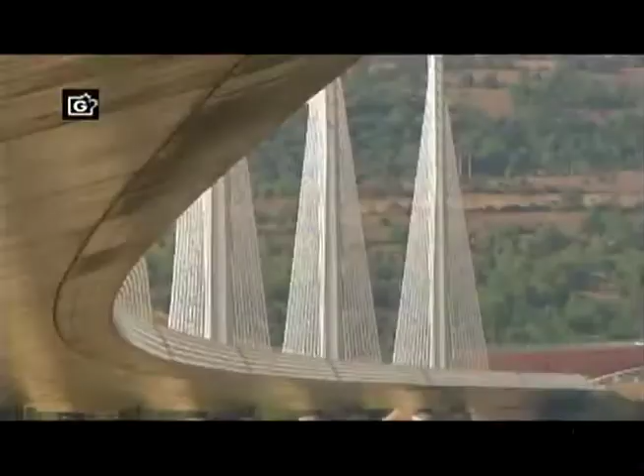This is the Millau Viaduct, the tallest bridge in the world. Its highest tower stretches a staggering 343 meters. So high, the bridge glides above the clouds. But this is a megastructure they said couldn't be built. When I first showed the drawing of this bridge, they really thought I was crazy.

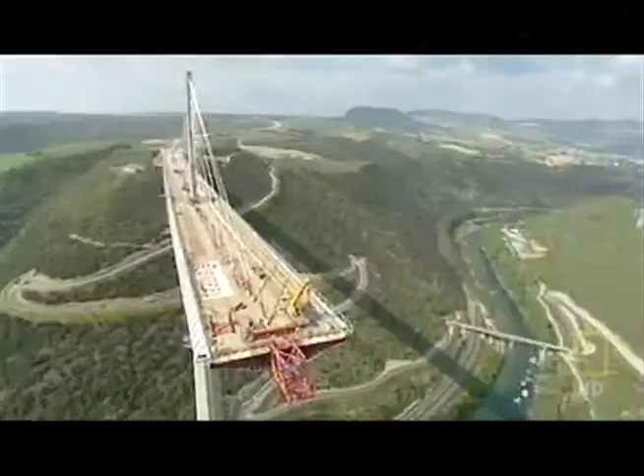The team attempting to build this amazing freeway in the sky had to survive landslides, fight winds gusting at 130 kilometers an hour, and weather massive storms as the bridge simply hung in the balance. It's a bridge that pushes the boundaries of engineering to the limits, and then beyond.

Imagine building a series of Eiffel Towers, then slinging a 4-lane highway between them, all the way across one of the deepest valleys in France. Impossible though it sounds, that pretty much describes the building of the Millau Viaduct.

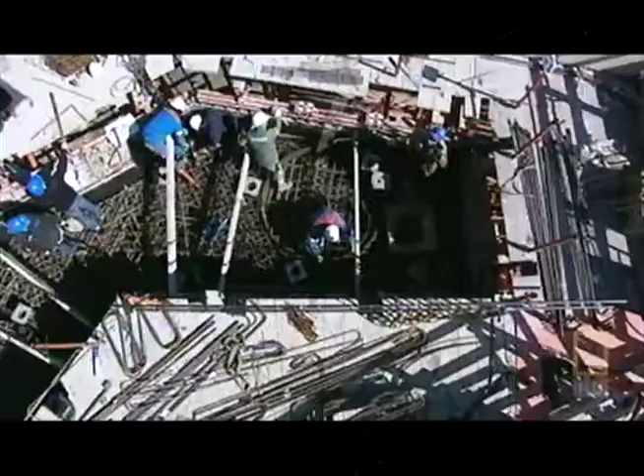From the start, the construction team faced 3 daunting challenges. 1, build the tallest bridge piers in the world. 2, put a 36,000-ton freeway on top of them. And 3, erect 7 steel pylons, each weighing 700 tons. And what's more, they had to do this hundreds of meters above solid ground. So high that if you were on top of the Eiffel Tower, you'd still be looking up at this awesome bridge.

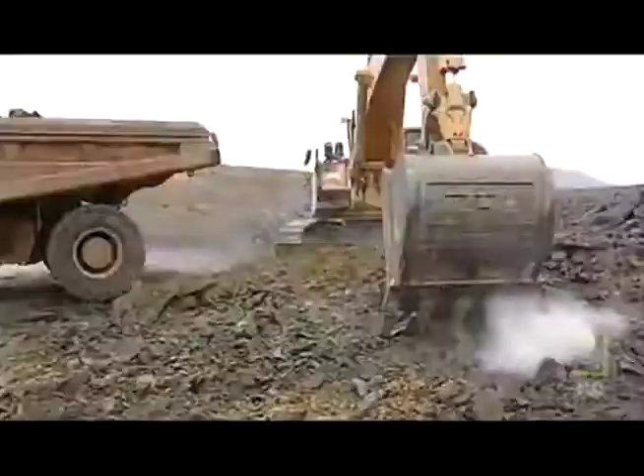October 2001, the team break ground. They're required to build a bridge that'll last for 120 years. And to win the contract, the teams promised to build it in record time, less than 4 years. By comparison, the world's longest suspension bridge, the Akashi Kaikyo in Japan, took a full 10 years to build. To up the ante, any delay will cost them $30,000 a day in penalties.

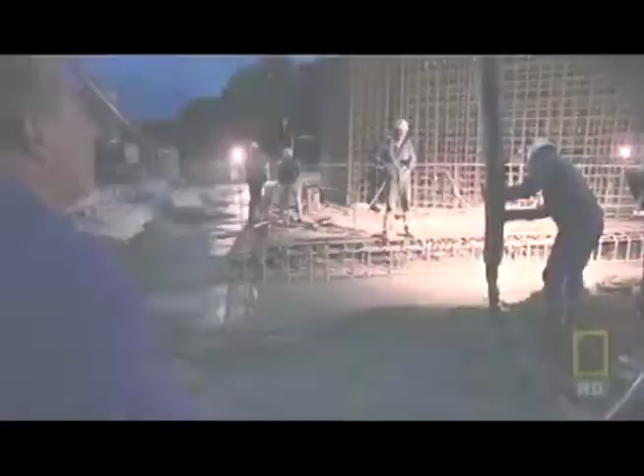There are 7 piers that are numbered from the northern end of the valley. Number 1 will pose problems because of the steep slope. Number 2 will be the biggest challenge since it's the tallest. Crossing the river, number 3 is not much shorter. Then 4, 5, 6, and 7 climb the gentler slope to the south.

To begin, the team had to bury the foundations deep in the bedrock in order to support the enormous weight the bridge will place on them. But the forces of nature were stacked against them. Geologists have warned of the risks posed by the region's fractured limestone. The rock is full of cavities that are essential to the local cheese economy. These cave systems close to Millau are home to a unique bacteria responsible for the blue mold in the world-famous Roquefort cheese. But what's perfect for cheese could be disastrous for a megastructure.

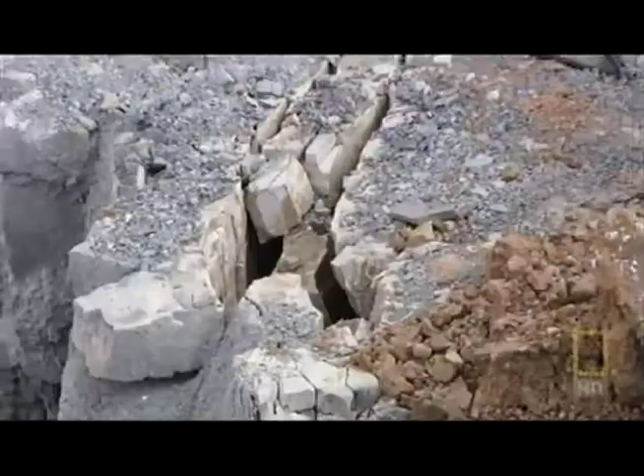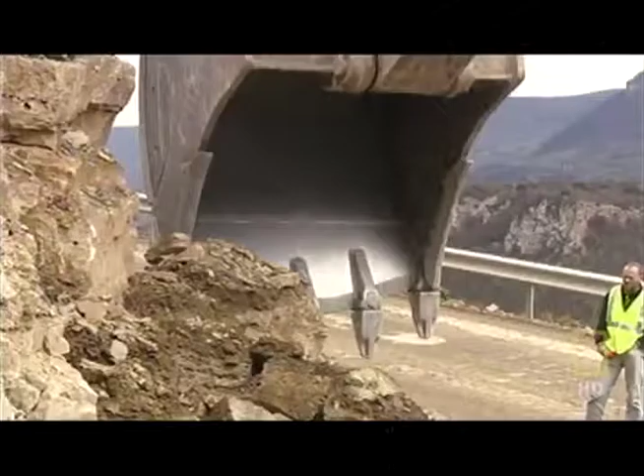The geologist's diagnosis spelt one thing: landslides. This kind of catastrophe could jeopardize the entire project. Despite the warnings, building went ahead as planned. Then, well into construction, as predicted, a dramatic storm causes a landslide. 4,000 cubic meters of rock collapse around Pier 1. Fortunately, the fallen rock doesn't damage the pier, but the warning is clear. They're forced to divert precious manpower and equipment to stabilize the slope and prevent a repeat collapse.

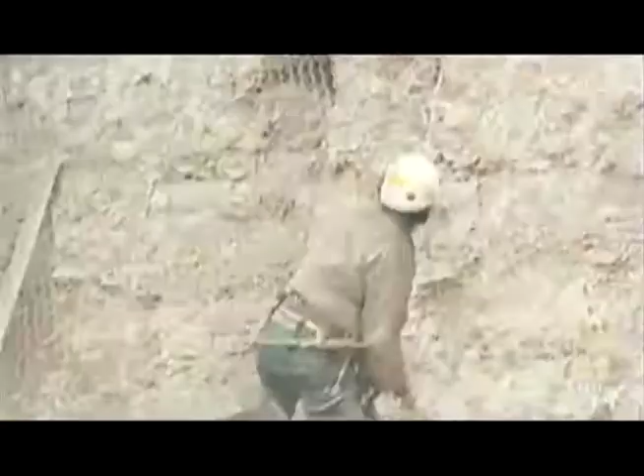So if the area is prone to landslides, why did they build the world's tallest bridge here in the first place? The answer is simple. In the 1980s, France built a freeway linking Paris directly with Spain. This major artery headed south across the French countryside, while from the Mediterranean, the freeway headed north, until they both hit one of the deepest valleys in France and stopped dead. Welcome to Millau, France's least favorite bottleneck.

The town of Millau is in the mountainous region of the Massif Central, one of the most tranquil parts of France. But in summer, this poor medieval town suffered traffic hell. The locals couldn't take it anymore. Neither could their mayor. It was terrible for our reputation. When you hear every day on the television and radio, avoid Millau, there's a traffic backup, a 5-hour wait in Millau. It's clear exactly why the bridge was needed, but it took the French government a very long time to get round to building it.

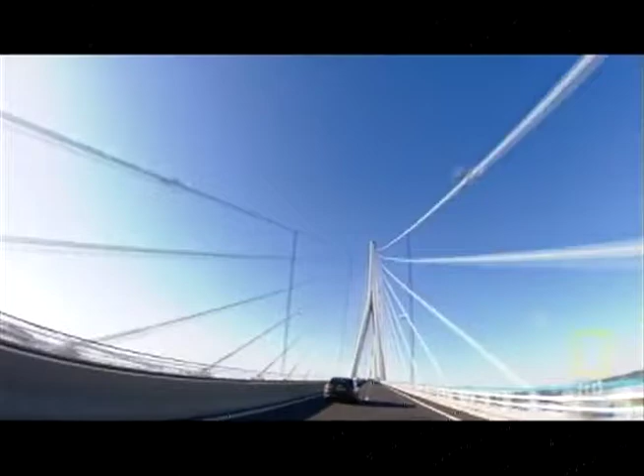12 years before construction began, up in Paris, the Ministry of Transport first came up with a plan. Their head bridge builder, Michel Virlogeux, is no ordinary engineer. He's a man who thinks big, very big, like the Normandy Bridge in northern France, the longest cable-stayed span in the world. With this record-breaking structure completed, Virlogeux was on to his next, Millau. His plan, another cable-stay bridge, but pushing the technology beyond anything previously attempted, with piers 4 times higher than the Normandy Bridge.

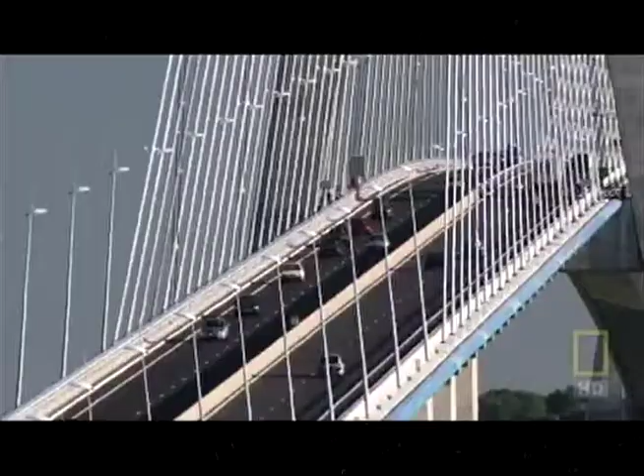The Millau Bridge would not only be the world's tallest, it would be unlike any bridge ever constructed. When I first showed the drawing of this bridge to the concerned authorities, they really thought I was crazy. Virlogeux's Normandy Bridge has 2 sets of cables supporting the deck. But he wanted to up the stakes for Millau by losing 1 row of cables, so the remaining line would be forced to do twice the work.

More dramatically, the 2.5-kilometer Millau Bridge, instead of having a single main span, needed a whole series of piers to support it across the valley. No bridge builders had ever attempted a multiple-span, single-line cable-stay bridge on this scale before. The French authorities had a problem. Nervous about Virlogeux's groundbreaking scheme, they held a competition inviting other engineers and architects to compete with different designs.

The winner, Lord Norman Foster, is one of the world's superstar architects. In Hong Kong, he built the world's largest airport terminal. In Barcelona, offices literally hang from a mast on his communications tower. This is a man who regularly contemplates the impossible and delivers. You know, it's the challenges, and it's one challenge on top of another, on top of another. And with Millau, one of the biggest challenges was making it fit into the landscape, given it's just down the road from the famous Gorges du Tarn, France's equivalent of the Grand Canyon.

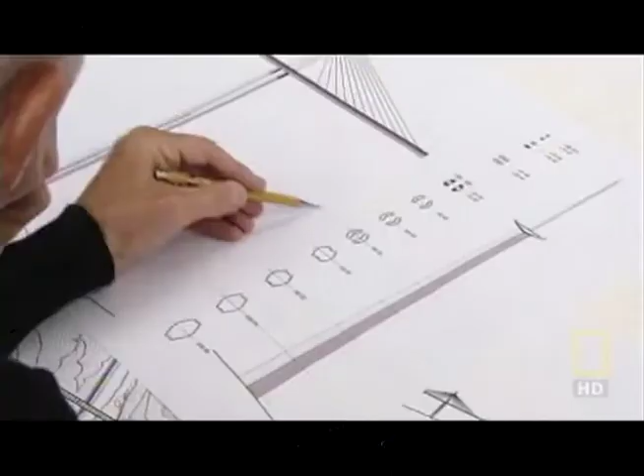How do you make something which has to be so immensely strong against the forces of nature look very gentle, very delicate? How do you weave something on that scale into the most unbelievable landscape? Ironically, Foster's answer was to take Virlogeux's pioneering scheme, then push it 1 stage further. He turned an elegant piece of engineering into a delicate work of art by boldly cutting out 2 of the 9 original piers and seriously slimming down the remaining piers and road deck.

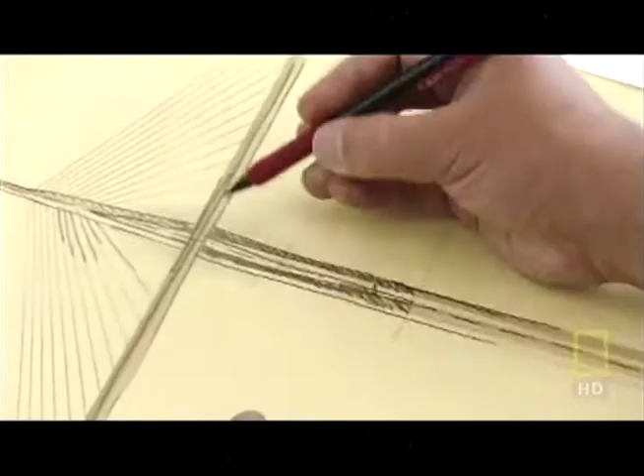Foster wanted the bridge to appear as delicate as a butterfly, but this butterfly has to support the weight of 5 Eiffel Towers in gale-force winds hundreds of meters above the River Tarn. Getting the design wrong would be a disaster. Then, with Millau still on the drawing board, Foster's record as a bridge builder suffered a major setback.

His Millennium Bridge in London is actually another record-breaking structure. The lowest profile suspension bridge in the world. But when this footbridge opened to the public in June 2000, it was a public relations disaster. Crowds walking over it set up a resonant frequency and the bridge began to sway. As people adjusted their step to the small initial wobble, the effect was magnified.

Though it didn't threaten the structure, the swinging motion became so dramatic, the authorities closed the bridge for a refit that took 1.5 years and ended up costing over $8 million. It was a bad omen for the Millau Bridge, where construction was soon to begin. And at 15 times the height, a design flaw would be a catastrophe.

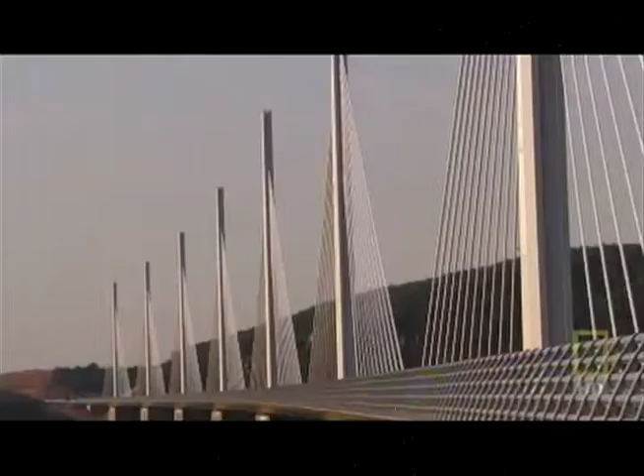December 2001, France's Millau Viaduct, the tallest bridge in the world, is under construction. Everything about this project is supersized. It'll need 200,000 tons of concrete, so much that the team have to build a concrete factory on site. The enormous piers are built step by step by pouring concrete into a temporary mold. To give the required strength, the molds are filled with a frame of steel reinforcing bars.

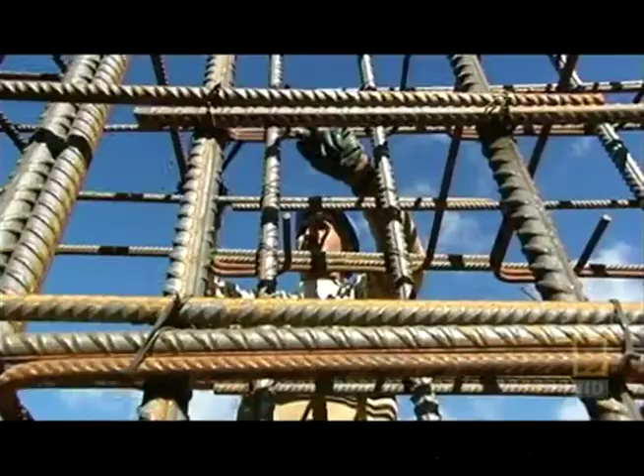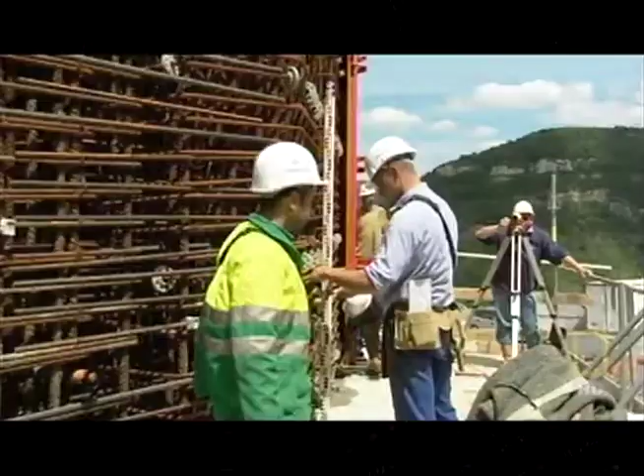In total, 16,000 tons of these steel bars are hoisted into place and secured. Laid end to end, they'd stretch the 4,000 kilometers from Millau all the way to Central Africa. The shape of each pier is seriously complicated. As a result, each time they remove the sections of red steel shuttering, they have to change the shape of the mold to fit the profile of the next 4-meter section.

Manhandling these steel panels weighing up to 15 tons apiece is no picnic. And with the combined height of the 7 piers totaling well over 1 kilometer, they have to change the shape of the mold over 250 times. Every 3 days, each team on each pier went through this whole cycle. Then they repeated the process. But it was a race against time, with a permanent threat of delay.

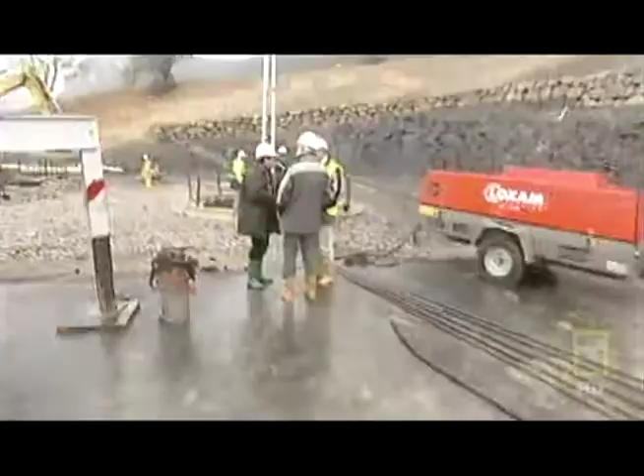Keeping the entire build on time and to budget was the daunting responsibility of one man, Jean-Pierre Martin. If instead of 3 days we took 4, imagine that multiplied by the number of castings. We'd end up with a 3 or 6 month delay. With a penalty of nearly $1 million a month, this isn't something Martin wanted to contemplate. And this schedule wasn't his only headache.

You have to be pinpoint accurate when you're building the tallest bridge piers in the world. Get it wrong, and the bridge simply won't fit together. Just 10 centimeters out, about a hand's width on each 4-meter section, and the tallest pier could be 6 meters off at the top, the width of a jumbo jet fuselage.

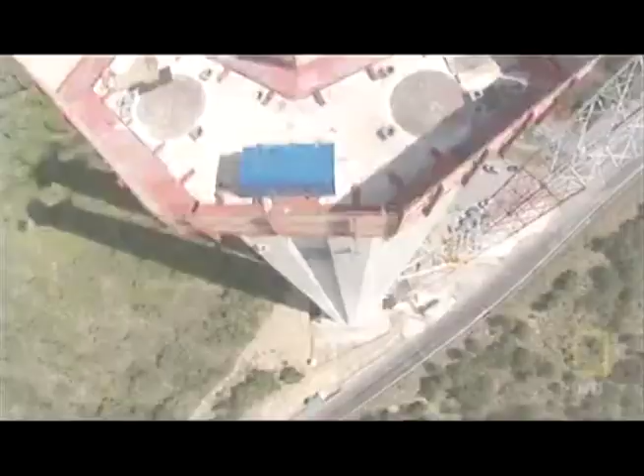Each team was aiming for a specific point in the sky. For Pier 2, this was exactly 245 meters above the ground, 546 meters from the north side, and 1,914 meters from the southern end. There was no room for error. The only chance they had to get it right was with GPS, accurate to within 4 millimeters. Using signals from multiple satellites, the team could pinpoint their position and make sure they're on target for that critical point in the sky they needed to hit.

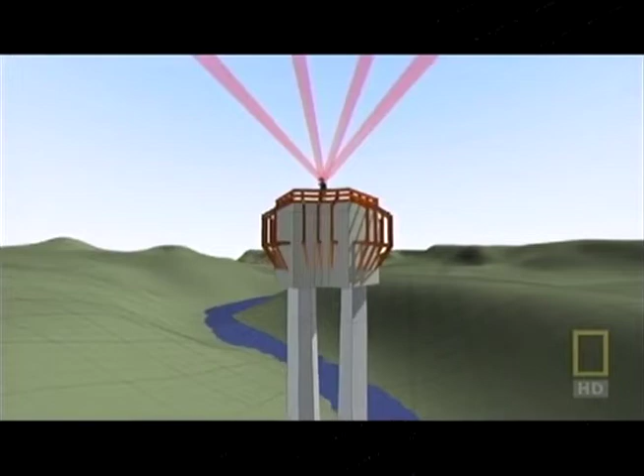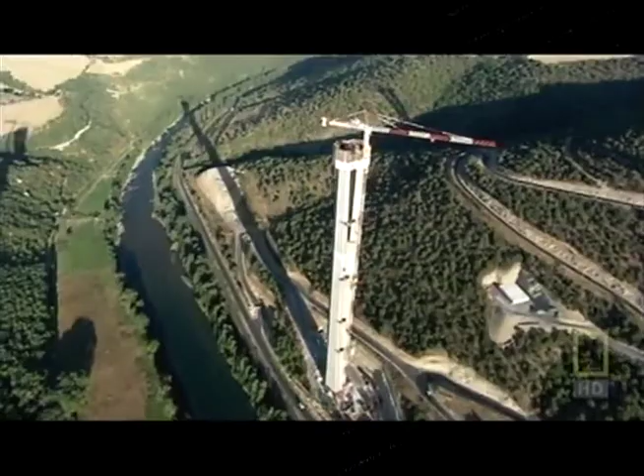Month after month, the piers climbed higher. Finally, by November 2003, they reached their full height. At 245 meters, Pier 2 becomes the highest bridge pier in the world. But is this record-breaking pillar where it's supposed to be? Amazingly, it's dead on target to within 2 centimeters.

Champagne corks pop. It's time for a major celebration. Against all the odds, they were 1 month ahead of schedule, but the team couldn't afford to relax. The next stage of the project would be the most difficult part of the build. Phase 2 of building the world's tallest bridge involved putting a 2.5-kilometre roadway weighing 36,000 tons on top of the piers, a full 270 metres above the River Tarn.

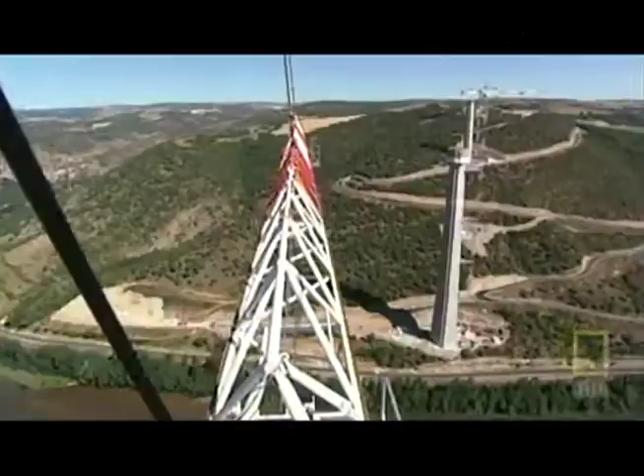Bridge builders know danger comes with the territory, but working at these heights can be lethal. More than 34 died constructing New York's Brooklyn Bridge. 35 died in 1970 on the Westgate Bridge in Melbourne, Australia. And 1 year later, 13 workers were killed when the Koblenz Bridge in Germany collapsed into the Rhine.

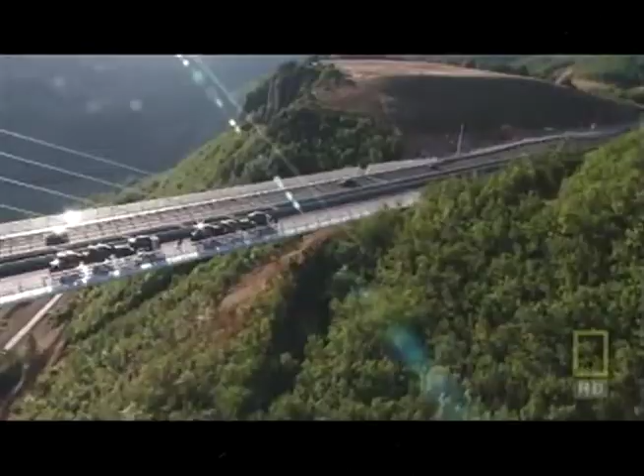With these fatalities in mind, the team decided to fabricate the entire road deck on the safety of solid ground. This meant building it in steel, which in theory would be much safer than lifting vast concrete sections hundreds of meters into position. There's only one problem with this plan. No one had ever put a road deck on piers anything like this height before, let alone over a 2.5-kilometre span.

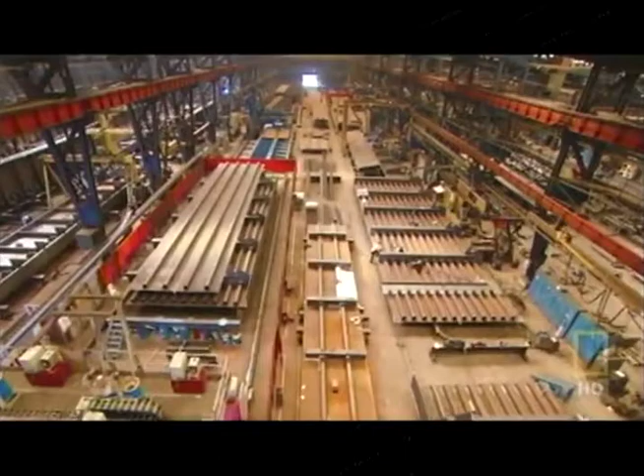In the end, only one steel manufacturer had the courage to take on this colossal challenge. Eiffel, the steel firm set up by the great French engineer. Eiffel built what was once the tallest bridge in the world, the Garabit Viaduct in southern France, before getting round to the framing for New York's Statue of Liberty and, of course, his signature tower in Paris.

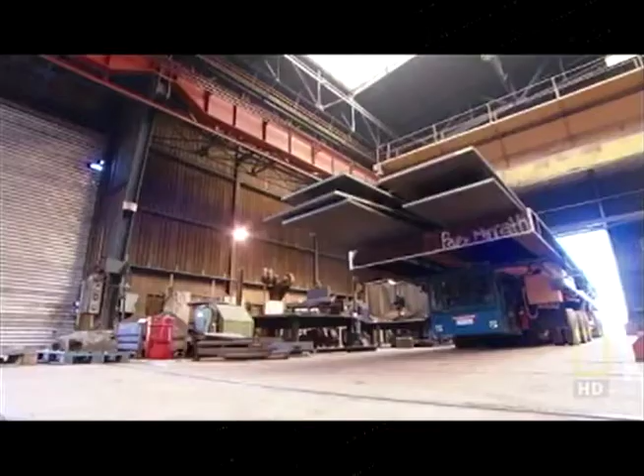But despite the company's experience, Eiffel's director, Marc Buonomo, knew he was taking a serious risk. It was a gamble for the company, because if there had been a mistake, if it hadn't worked, it would have been the whole company. They fabricated the massive sections that would make up the road deck in the company's steel factories. This immense jigsaw puzzle involved manufacturing 2,200 separate sections, weighing up to 90 tons, and some of them 22 meters long.

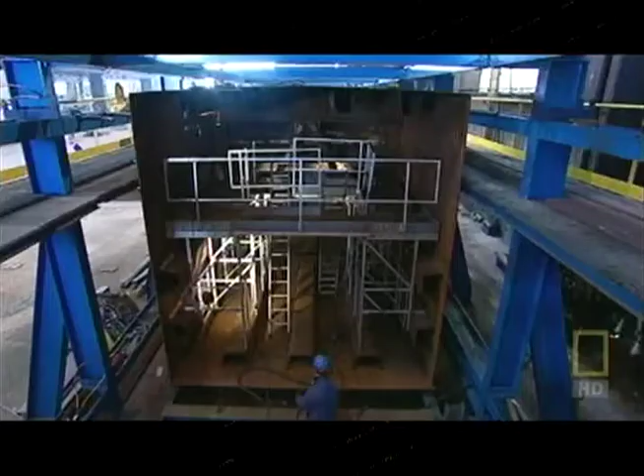Their accuracy is measured with a laser to within a fraction of a millimeter. The huge square tubes are the central spine that should make the deck rigid. The triangular side panels will be welded on either side to create the width for a 4-lane highway. To meet the punishing schedule, Buonomo automated the manufacturing with a 2-headed welding robot and a plasma cutting machine.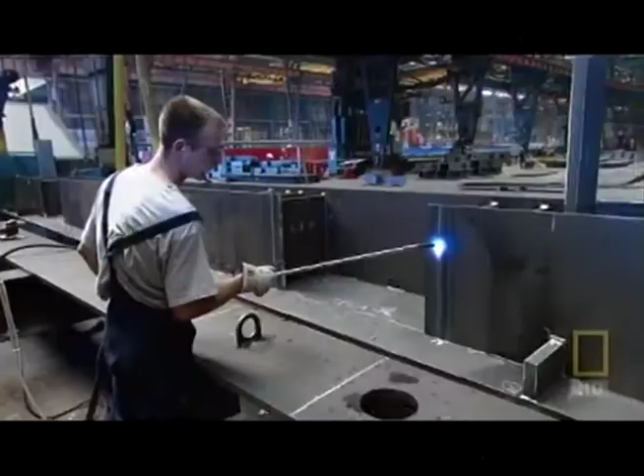Each cutting pattern or template is programmed into the computer. Then the machine automatically blazes its way through the steel. The torch reaches a scorching 28,000 degrees centigrade. That's 5 times the temperature of the Earth's inner core. But cutting and welding was the easy part. The hard part was getting these monster sections the hundreds of kilometers from the factories to Millau.

The routes had to be planned with precision to avoid major damage. The police coordinated safety and clearances. Even with that level of preparation, some obstacles felt as if they're cutting it just too close for comfort. And this was no one-off event. To build the viaduct took over 2,000 of these extraordinary road convoys.

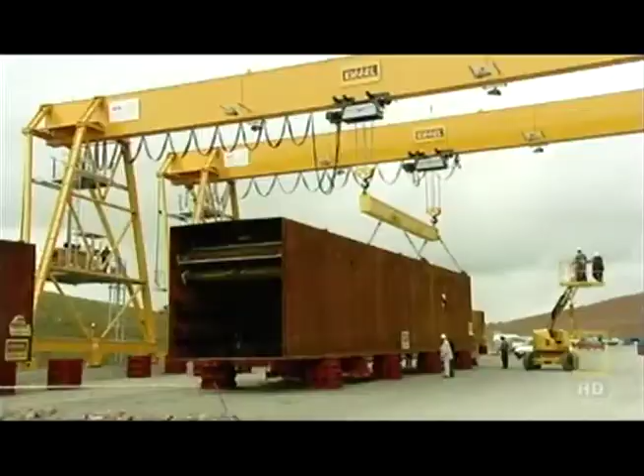The components arrived at assembly plants set up, one on either side of the valley. Here, the pieces of a massive jigsaw puzzle were welded together to form the 2 halves of the deck. But getting these 2 halves to span the valley on top of the world's tallest bridge piers would be a major challenge. They'd be the first team to put a road deck on a pier taller than an 80-story skyscraper.

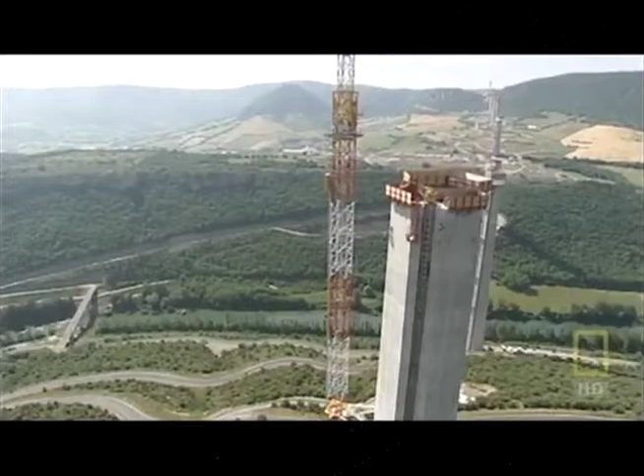And pushing bridge building beyond anything attempted before, they planned to slide the entire 2.5-kilometer road deck over in 2 colossal pieces. The bridge's chief engineer, Jean-Marie Cremer, was one of the few people who believed it could be done. All the engineers who know this method, who were in the know, didn't believe it was possible. If the team had got their calculations wrong, the entire structure could collapse into the valley.

We found a solution for the construction, which was to launch the bridge from the 2 sides. One part on the Larzac Plateau, one on the Rouge Plateau. And to push them from the 2 sides and to make them come and meet here above the River Tarn.

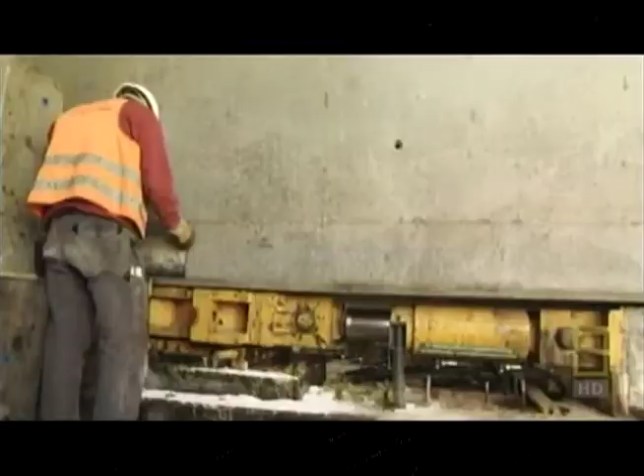Smaller bridges use a similar technique. A powerful set of hydraulic rams literally pumps the deck from one side to the other. But Millau would be the longest launch ever attempted over the highest piers in the world, and the results could spell disaster. The deck is so slender, it would bend and collapse if it were pushed out over the 342-meter spans between each pier. The furthest anyone's previously managed is less than half that distance.

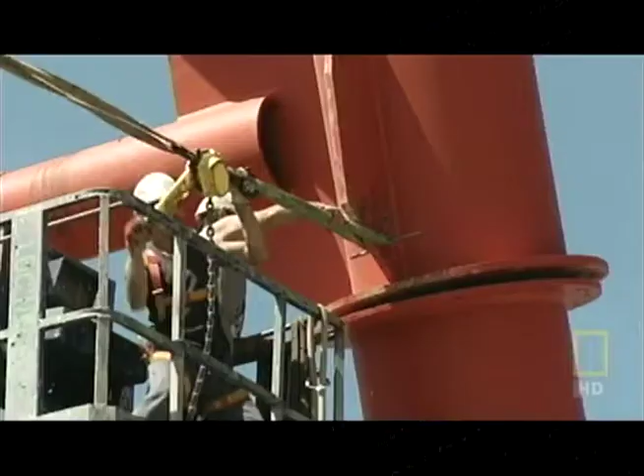The first part of the solution was simple. Fit a pylon so its cables support the front of the deck as it goes out over the valley. Then construct temporary steel support towers that halve the spans to a more manageable 171 meters. These steel towers were a construction feat in themselves. The largest, over 170 meters high, is the tallest ever built, and they needed to carry a massive load.

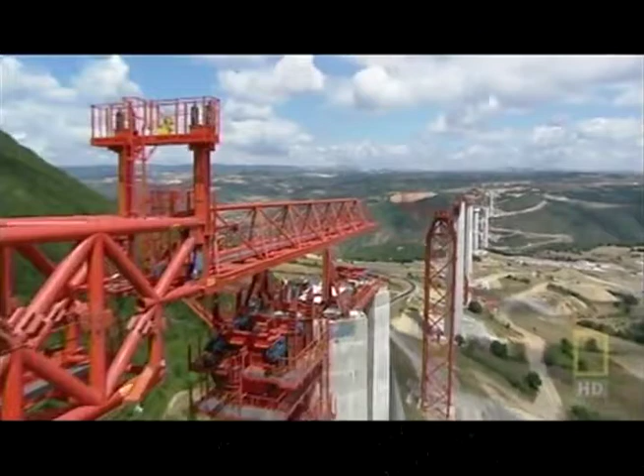7,000 tons as the leading edge of the deck, together with the first 90-meter pylon, slide over. And simply pushing this enormous weight over the top of the vulnerable piers would bring them crashing to the ground. This was the nightmare scenario. If we'd done a conventional launch, we would have knocked the piers over like the pins in a bowling alley.

Someone needed to reinvent the way this type of bridge is built. And it's Marc Buonomo with Jean-Marie Cremer who came up with the breakthrough. The trick is to use a series of these launching systems to jack up the deck and inch it forward. Each system uses 2 wedge-shaped blocks under each side of the deck. The upper wedge is pulled forward by a hydraulic ram.

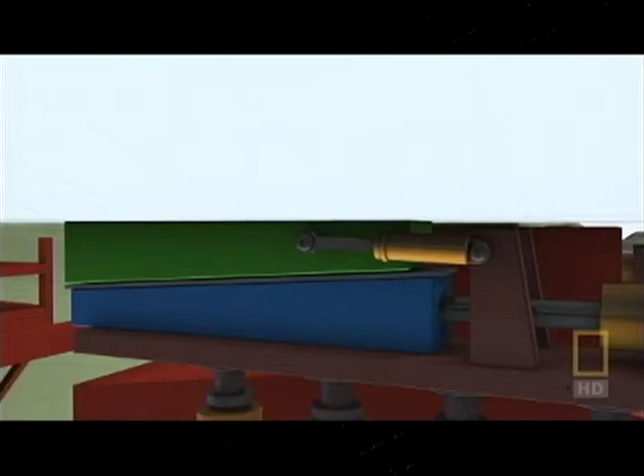It slides up the slope of the lower wedge, at the same time lifting the deck from its supports and advancing it 600 millimeters. The lower wedge then retracts, dropping the deck onto its supports. The upper wedge returns to its original position, and the whole cycle begins again. 4 of these clever devices are placed on each pier, all programmed to work at exactly the same time. The result is that together, they pick up the entire roadway and shunt it forward.

But if one fails or gets out of step, it could spell disaster. The force could push the bridge piers apart till they collapse. When you're up there and you see Millau 300 meters below you, you ask yourself, was this a good idea? The future of the entire project was now hanging on a prototype, and it had never been tested.

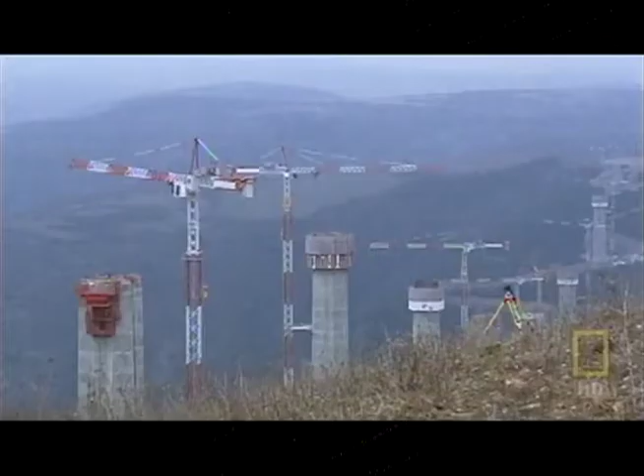It's the morning of February 26, 2003. Do or die day for the world's tallest bridge. Everything is about to be put to the test. The flexibility of the deck, the strength of the temporary piers, and critically, the pioneering hydraulic ram system. Even Buonomo, the man in charge of the launch, had his doubts. As it had never been done before, I have to tell you, I had fears that it wouldn't work.

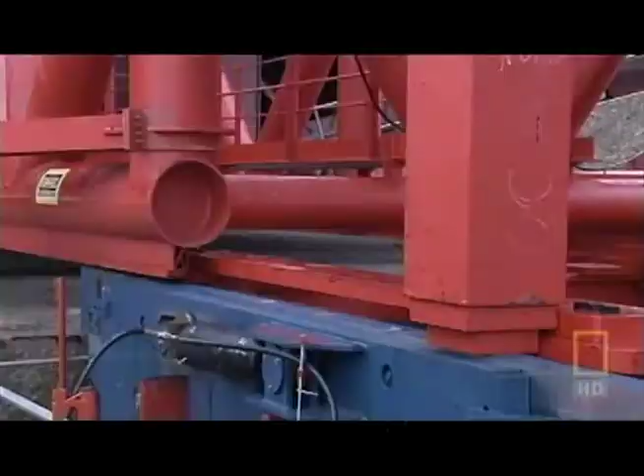The pumps kick in, the pistons start to push, and the deck begins its huge journey across the valley. The moment I heard the motors start, I put my finger on the deck and I could feel my finger move. Every 4 minutes, the deck advanced 600 millimeters across the valley. Surveyors tracked its progress. But it was still a nail-biting time as they watched the unsupported deck crossing the void.

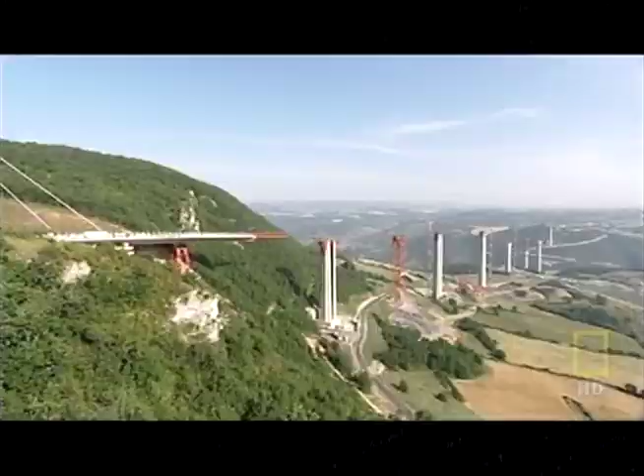Eventually, the deck reached the safety of the first pier. 204 meters down, only 2,256 to go. The launching system seemed to be working as planned. The engineers were feeling optimistic. But as the deck advances into space, it'll become more vulnerable to the wind, which can reach 130 kilometers an hour. Unfortunately, the road deck has the shape of an upside-down airplane wing, and the team's greatest fear is that this wing could simply take off.

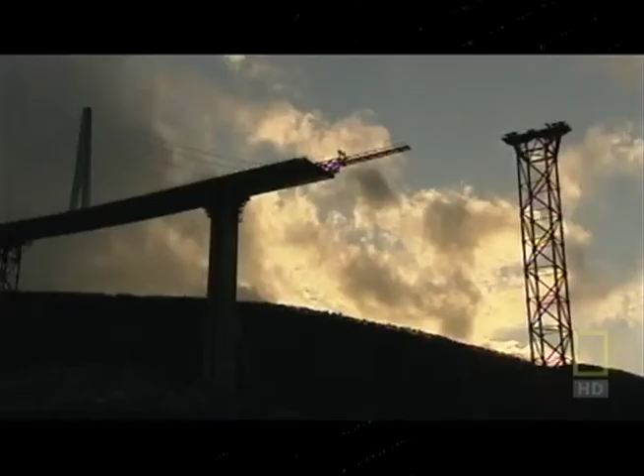The engineers kept a close eye on the wind and weather conditions. When they were satisfied there was a 3-day weather window and the wind wouldn't exceed 85 kilometers an hour, they'd give the construction team the go-ahead, and the deck launch could continue. The reason for this precaution is simple. Strong winds can literally tear a bridge apart.

In 1940, Washington State built a suspension bridge across the Tacoma Narrows in the U.S. Northwest. It opened with a grand ceremony on July the 1st. But the celebrations were short-lived. The bridge had a major problem: the wind. Girders beneath the deck, designed to make the bridge rigid, actually blocked the wind, causing the roadway to ripple alarmingly.

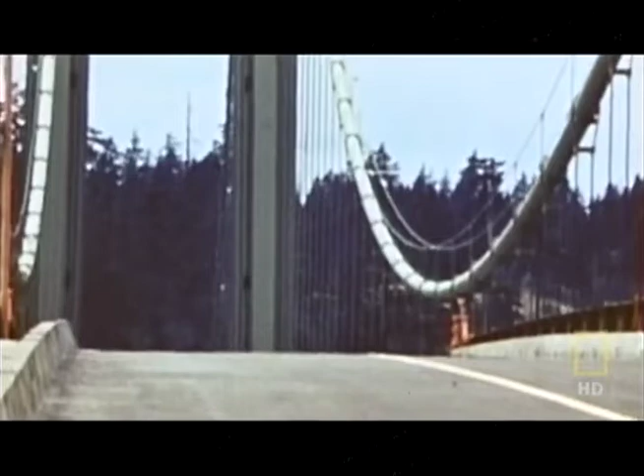Locals soon dubbed it Galloping Gertie. On the 7th of November, with the wind less than 70 kilometers an hour, the bridge begins to twist violently. At 11 a.m., time runs out for Galloping Gertie. The wind sends the bridge crashing into the river.

Wind tunnel testing is now standard procedure as a direct result of Galloping Gertie. For the Millau Bridge, they analyzed the wind in the Tarn Valley over 18 months, then recreated those conditions in the wind tunnel. Wind engineer Olivier Flamand was shocked by the results. The average wind speed was relatively low, but because there's such strong turbulence, it created very fast peak winds.

The rugged terrain creates serious turbulence at the height of the road deck. Winds peak at 130 kilometers per hour. That's hurricane force. They tested every aspect of the bridge to analyze the risks: piers, pylons, and critically the deck.

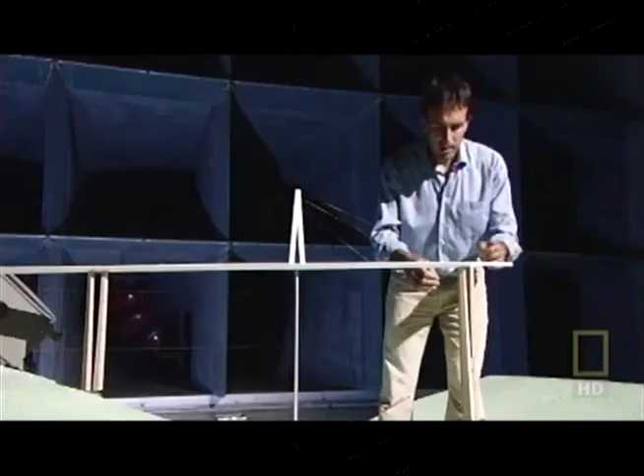But it's not just the aerodynamics of the finished bridge. They needed to find out how it would behave when it was most at risk, during the launching of the deck. Olivier and his team reached a chilling conclusion. The winds they've measured are strong enough to blow the unsecured deck off its supports and send it crashing hundreds of feet to the valley floor.

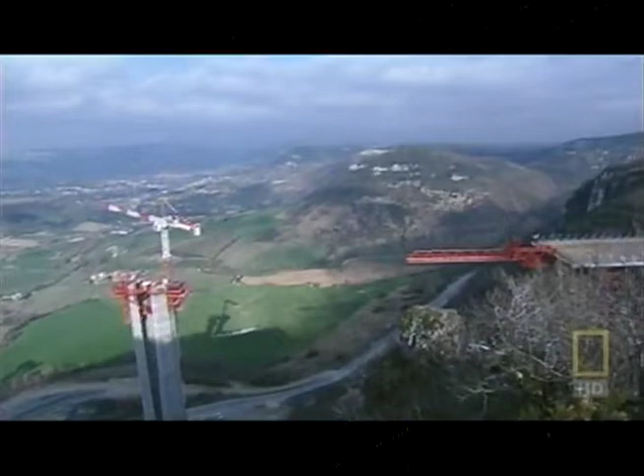And then the nightmare began. On the 22nd of August 2003, 6 months into the deck launch, one of the launch systems failed, leaving the deck hanging in the wind. To make matters worse, the weathermen were predicting storms. So far, these massive pumping machines had worked perfectly. But the fact is they were prototypes, and due to the frantic schedule, they'd never been tested.

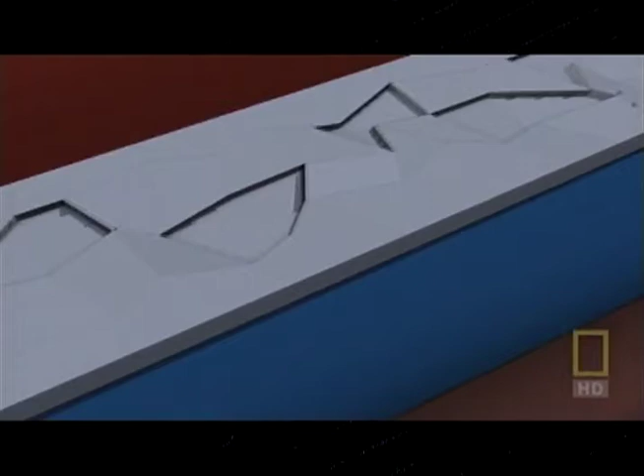The problem was that the non-stick Teflon between the sliding surfaces had ripped, and the friction generated was too much for the hydraulic rams to push against. Unfortunately, no one had planned on replacing parts of this monster machine mid-launch on the top of a massive concrete pillar. This was very bad news for the man who staked his reputation on this system. It was maximum stress, like poison in your mouth. You don't forget that.

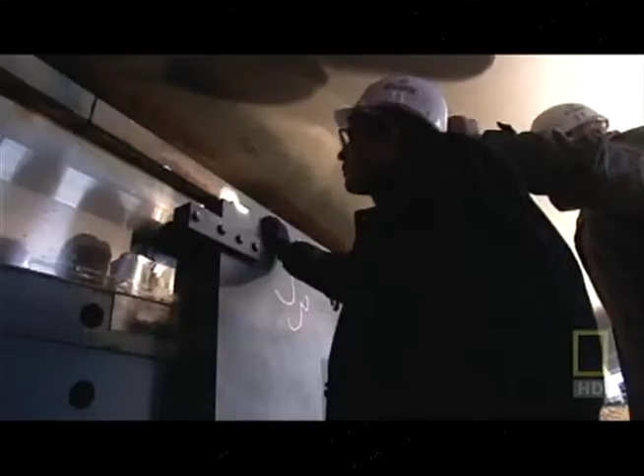Re-examining their calculations, they realized the cause of the problem. They'd underestimated the forces between sliding surfaces, but they wouldn't be able to repair it without the necessary spare parts. The clock was ticking, and Marc Buonomo needed a solution fast. When Apollo 13 came back with that incident, the NASA engineers requested they did the inventory of everything there was on board to know how to fix it.

The Millau team did an inventory. They realized that the other launching machines, not yet being used, could be stripped to provide the new Teflon surfaces they needed. Working all through the night, the team extended the access platform. This allowed them to take out the 5-meter-long, 2-ton steel wedges, replace the Teflon, and reassemble the launching machine. By 8 a.m. the next morning, it was ready to resume the launch.

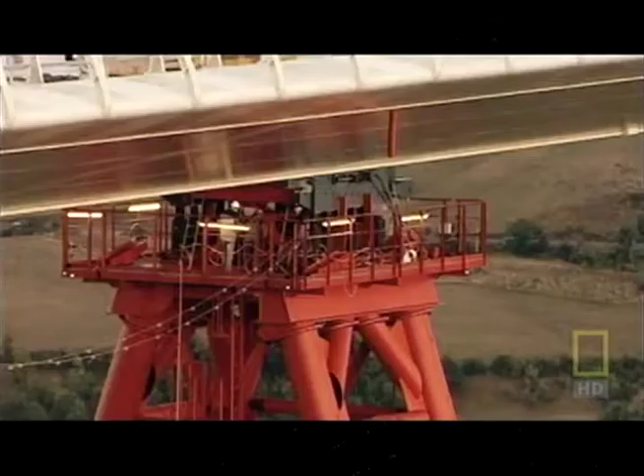The rest of the week, the predicted storms arrived, and another set of launching machines wore out. So when the deck finally made it to the safety of the next pier, the team breathed a major sigh of relief. You don't forget that. I won't forget that for 4 hours I was really scared. The two decks continued their journey across the valley. Day after day, week after week for a full 14 months, they approached each other, millimeter by millimeter.

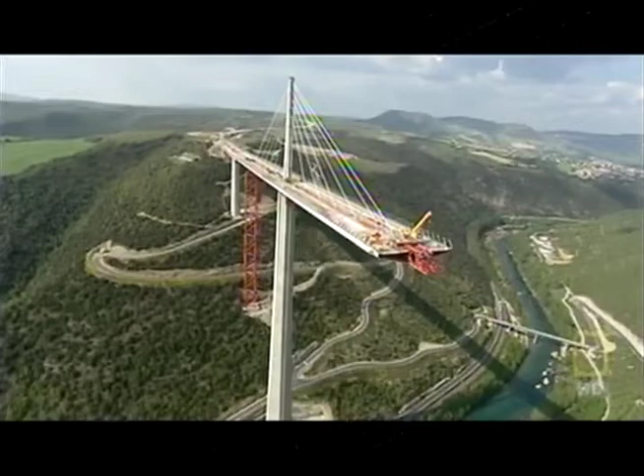By May 2004, they'd reached a critical phase. From the northern end, the shorter deck had traveled 717 meters into space to reach its final resting place. From the south, the longer deck extended over 1.5 kilometers. Only the section over the river, the one point where it was impossible to erect a temporary pier, divided them. But would they meet as planned? If they've got their calculations wrong, they'll have built the biggest white elephant in Europe.

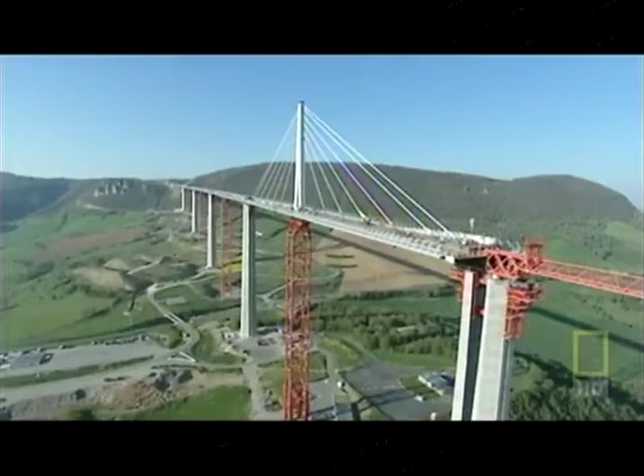Even the man behind the whole project had his doubts. I was not convinced at all that the two parts of the deck could meet exactly with a perfect geometry. The odds were against them. Calculating such a feat so precisely is a Herculean task. Firstly, the two starting points on the northern and southern slopes of the valley are at different heights. Secondly, the bridge has a subtle curve to it.

As a result, each steel panel which makes up the road deck had to be cut and welded with extreme precision. It would be an engineering triumph if they got these two sloping curved decks to meet as required. The team checked the weather reports. With the wind inside safety limits, they gave the go-ahead for the final push.

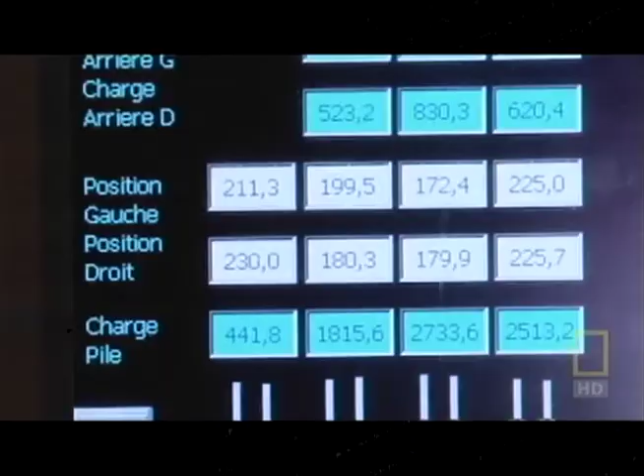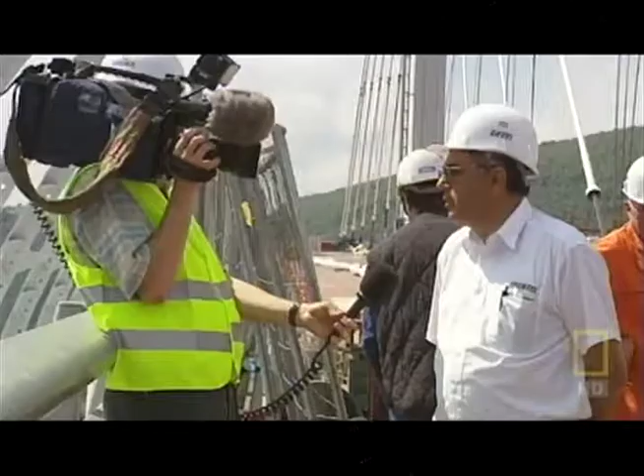The rams began to drive the deck's leading edge off the safety of Pier 3 towards its destination. At this point, a total of 21 launching systems needed to move at exactly the same moment to avoid disaster. If anything were to go wrong now, the man responsible would be Marc Buonomo.

Everyone asked me, how can you be sure that it will go straight? So to be sure that they were going to the right place, I had a GPS put on the front, so I could see the gap between the theoretical and the real position.

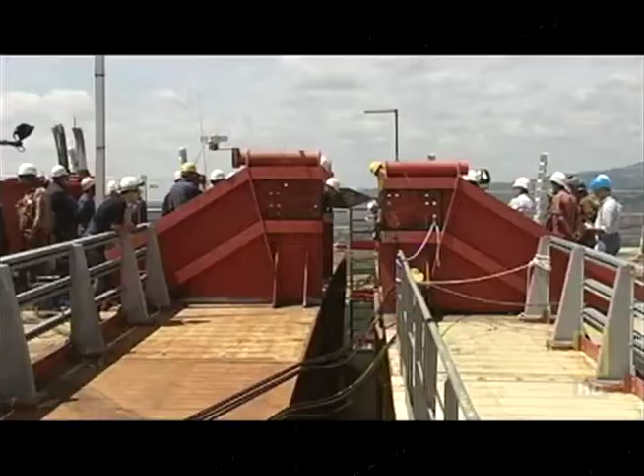Over the next 2 days and nights, the deck advances 600 millimeters at a time towards its final resting place. The world's media are watching the critical meeting of the decks. And to add to the pressure, the French Prime Minister is due to drop in to celebrate the event. The deck pushes forward. Now, with only centimeters separating the two sections, a magnum of champagne is hung between them to mark the moment.

At last, union. The two massive steel decks have traveled high over this valley, a total of 2.5 kilometers, and when they check, they're aligned to within 1 centimetre. That's accurate to within 99.9999%. All the measuring, all the calculations have paid off. They've nailed it.

The meeting of the decks was a special moment. News reports travelled round the world, and in Salzburg, Austria, they reached Felix Baumgartner, aka Felix the Conqueror. Felix has made a career base jumping from some of the tallest structures on the planet, and within 24 hours, he'd driven to Millau and was calculating the logistics for the jump, factoring in his 2 main aims, to avoid arrest and death.

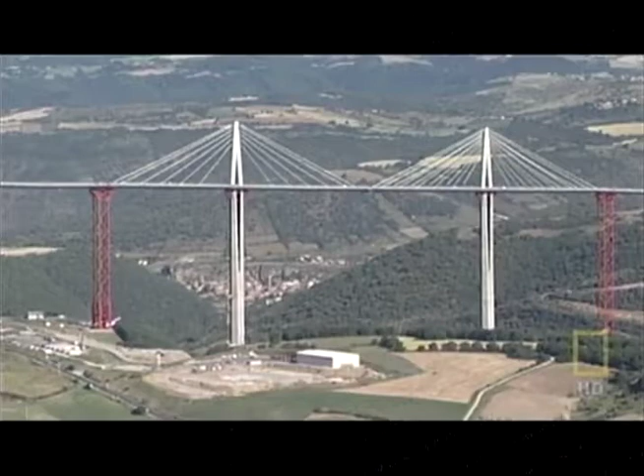Baumgartner waited for darkness before arriving on site. He found his way to the base of Pier 2, then climbed an access ladder the full 245 meters to the top. He entered the steel road deck and found a place to hide until daybreak. He had to remain concealed until the sun was high enough for his cameramen to record his world record attempt.

At 7 a.m. the following morning, Felix the Conqueror emerged. He took a cool backward flip off the tallest bridge in the world and entered the record books. The tallest bridge in the world, 250 meters. I did it. And having evaded death, he made sure he's not caught by the police.

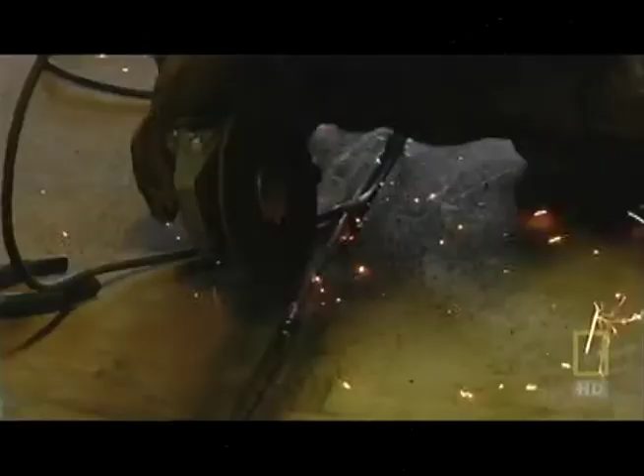The decks have been joined, the final phase of the project. But there was still a race to meet the schedule, and their problems weren't over yet. Everyone could see the dramatic undulations in the flexible steel deck. Even some hardened bridge builders wondered about its structural integrity. It was a huge surprise for everyone. All the engineers said, we knew steel was flexible, but not that flexible.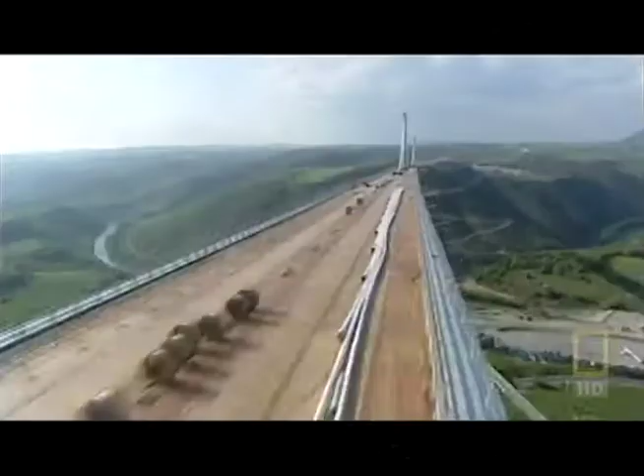The team were relying on the pylons and cables to pull the deck straight. Each massive pylon is 90 meters high and weighs 700 tons, the equivalent of 85 London buses. Placing them in position on the slender deck, high above the valley floor, would go beyond anything ever attempted. Once again, Marc Buonomo had a plan. You know, the first people to make vertical pylons were the Egyptians. Buonomo adapted a technique used in ancient Egypt to erect obelisks in the sands.

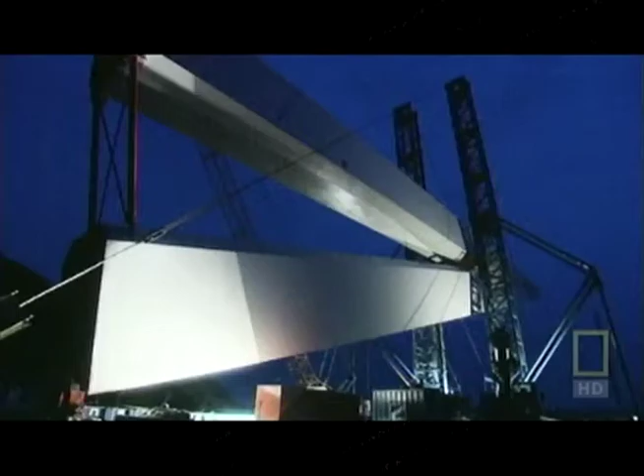On top of the road deck, the team put up 2 enormous steel towers, both of them secured by cables and equipped with a hydraulic system capable of raising 1,000 tons. The 700-ton pylon is then lifted by the hydraulics. As it rises, it pivots little by little until it's vertical. It's then lowered safely onto its anchorage point. Buonomo's 4,000-year-old technique worked to perfection.

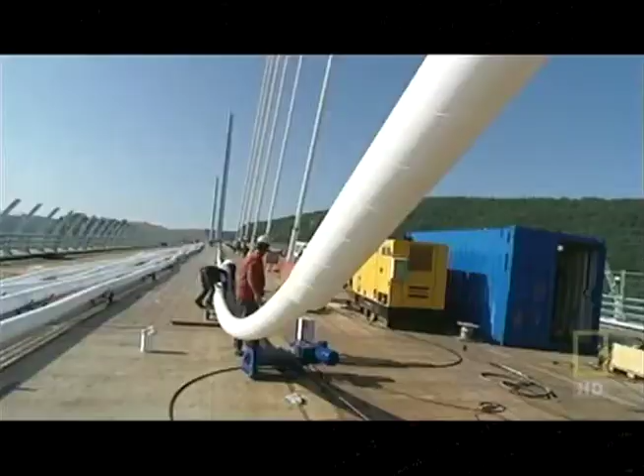With all 7 pylons in place, the team could attach the cable stays that would straighten the rippling deck and give it the strength to cope with full traffic loads. They hope. The weight of the roadway is now over 40,000 tons, the equivalent of a cruise ship, and the 154 cable stays should prevent it from sagging or collapsing. The strongest stays are made up of 91 individual steel strands and have a breaking strength of 25,000 tons, strong enough to hold back 25 jumbo jets, all at full throttle.

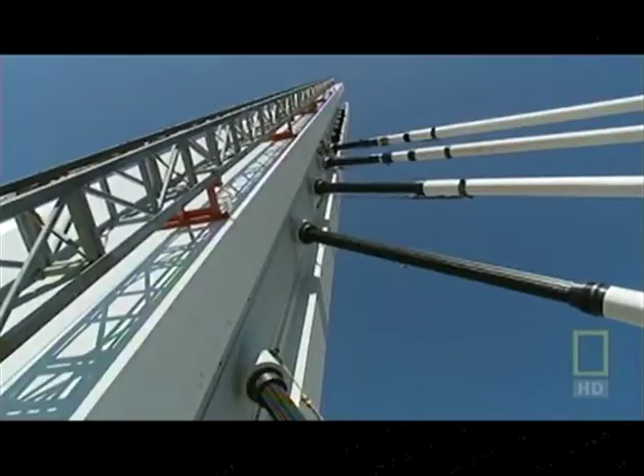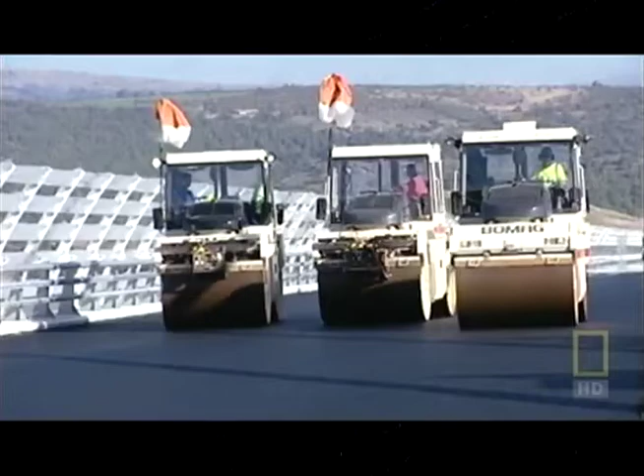As the cable stays are tensioned, true to plan, the ripples in the road deck are pulled straight. Over the 2.5-kilometer deck, the ripples are now no larger than the size of a thumb. They're finally on the home straight. The road surface goes on, adding a further 10,000 tons to the load. That's like driving 153 battle tanks onto the deck. But before it could open to the public, the team needed to know the bridge is safe. It would have to pass one crucial test.

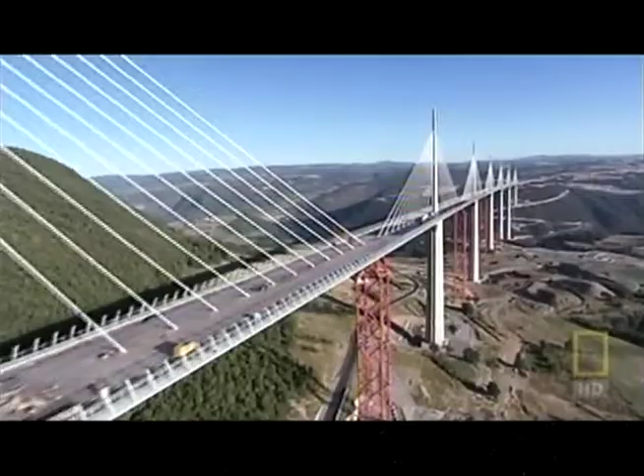After 3 years, the construction team building France's Millau Viaduct, the world's tallest bridge, are about to find out if they got their calculations right. On a single-span cable-stay bridge like the Normandy Bridge, a large load on the main section is no problem because the cables are attached to solid ground and can't give.

On the Millau Viaduct, with its 8 spans, the cables are attached to the deck of the adjacent sections. A load on one section will cause it to drop, pulling the stays down. As the pylons lean in, the matching stays are pulled upwards, lifting the neighbouring decks and causing a dangerous rippling effect.

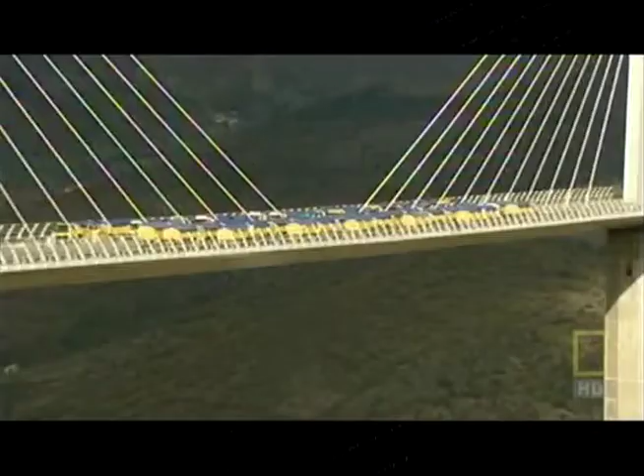It's right now the team put their bridge to the test. These 28 trucks have a combined weight of over 900 tons. They are now positioned in the critical point, mid-span. The engineers hold their breath. Measurements are taken. The span bends just 26 centimeters. This is a triumph for the engineers. The bridge was designed to cope with more than double that.

4 weeks later, on December the 14th, 2004, President Jacques Chirac officially opened the Millau Bridge. A proud moment for the whole of France. Just over 3 years of construction have produced the tallest bridge in the world, designed to last at least 120 years. And against the odds, the project manager even brought the job in on time. But that's not what he's most proud about. What I remember, because on construction sites there are often accidents, is that we had no serious accidents, nothing more than a minor injury.

As soon as it opened to the public, the bridge was an instant success. But the real test isn't till its first summer, when the French all take their annual vacation. No one ever expected anything like this. Numbers peaked at more than 50,000 vehicles a day. At over $7 per car, that's great news for the construction company, who are clawing back their $478 million investment in the project.

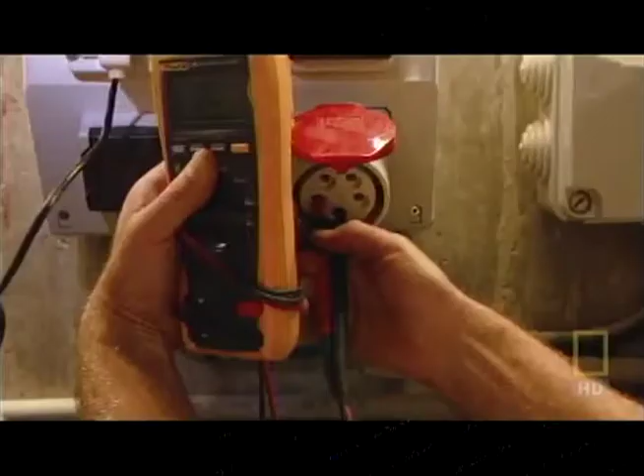This was an epic bridge to build, but it's just as epic to maintain. Thierry and Frank are assigned to P2, the world's tallest bridge pier. This structure is no solid concrete block. It's a series of vast hollow spaces. Their job today is to test the communication system and electric circuits on each of the 7 structural floors. This involves a 343-meter climb, going hand over hand up a ladder for the rest of the day.

By dusk, when Thierry finally reaches the summit of the pylon, he may be exhausted, but there is a payoff. You get a fantastic view from here, a 360-degree panorama.

The tallest bridge in the world has become an icon. But this is creating problems no one had ever imagined. Locals have been taking over the bridge as a platform to get media attention for their causes. This crowd was hoping that driving sheep over this freeway in the sky would help them get more farming subsidies. Jose's job is to prevent this kind of incident from creating a danger. And on this bridge, the incidents keep on happening.

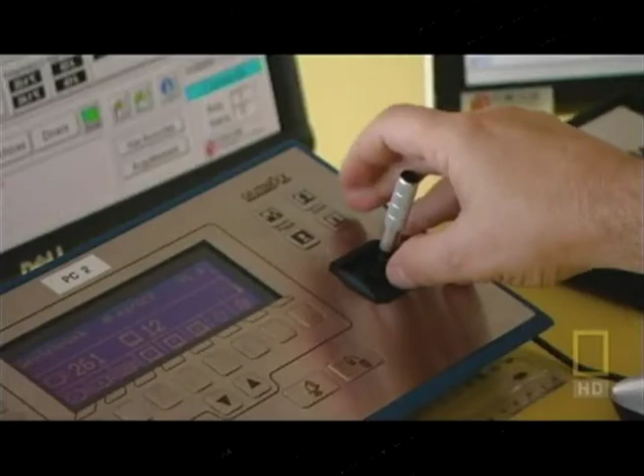An alarm triggered by a motion detection system means there's a stopped vehicle on the bridge. The last thing anyone wants is a multi-car pile-up on a 2.5-kilometer bridge, quarter of a kilometer in the sky. Jose zooms in his camera to reveal the man has left his car and is sitting dangerously on the crash barrier. The driver's probably only broken down. But already one man who stopped climbed over the wind barrier and jumped to his death. Bruno intervenes. Thankfully, it's no more than an irresponsible photographer who's sent on his way.

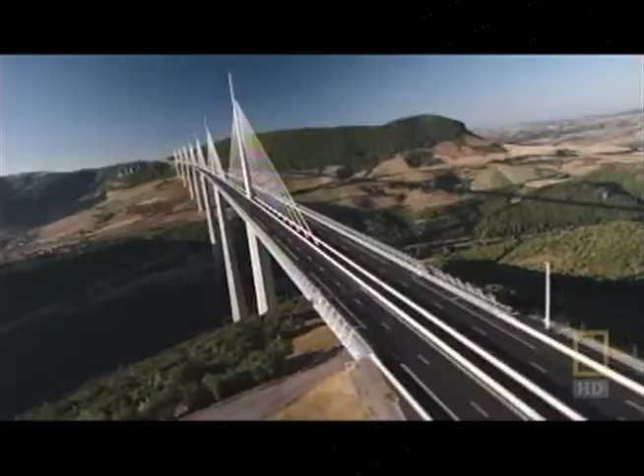You could say the Millau Bridge is a victim of its own success. It's definitely become a major tourist destination. 700,000 visitors in the first 9 months. Fortunately, most of them wait till they're off the bridge to take their photos. It's magnificent. I came 600 kilometers today to see the Millau Viaduct. There's only one thing to say. It's extraordinary. They're drawn because it's a world-beating structure, but also because it's incredibly beautiful, delicate and minimal. Not what you'd expect from a structure that's nearly a third taller than any other bridge on the planet.

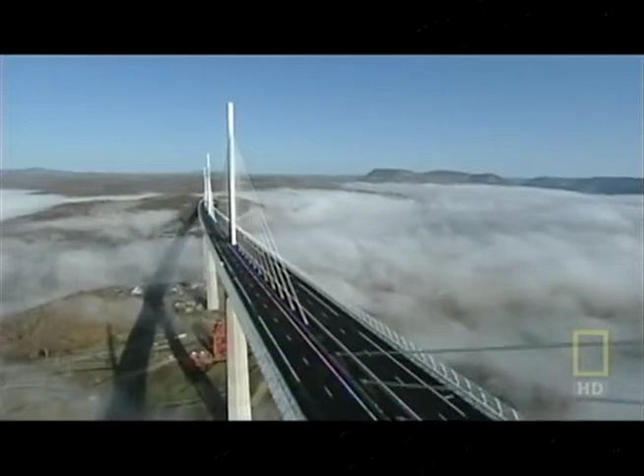And architect Lord Norman Foster's achieved his aim to give the driver the sensation of soaring. As you leave these plateaus, you do fly. You fly across this bridge. Literally, you are above the clouds. And the result certainly pleases the man who dreamt it all up. To see erected this bridge, which I imagined 15 years ago, it's something magic. This is the longest pure cable stay bridge in the world, the tallest roadway in the world, and of course at 343 meters, it is the tallest bridge ever constructed.